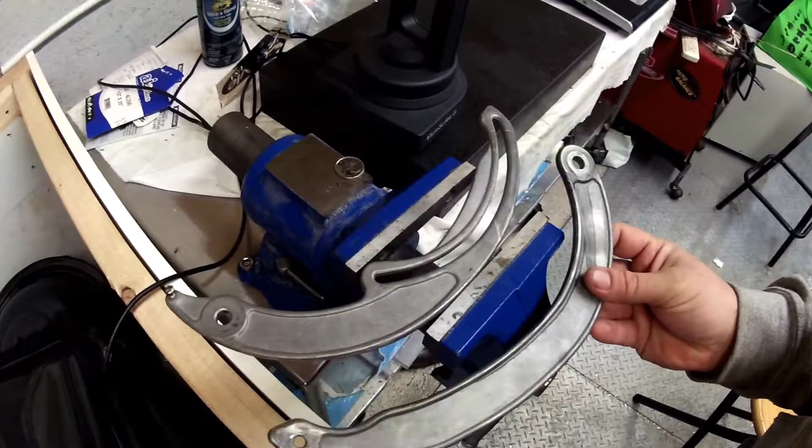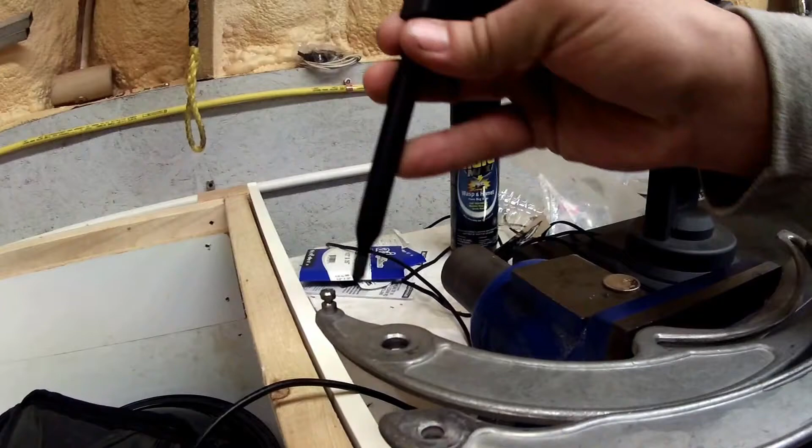These two parts are going to get mapped out and laid out using the Microscribe 3D Digitizer, just to get the dimensions of the parts and all the critical features, slots, holes.

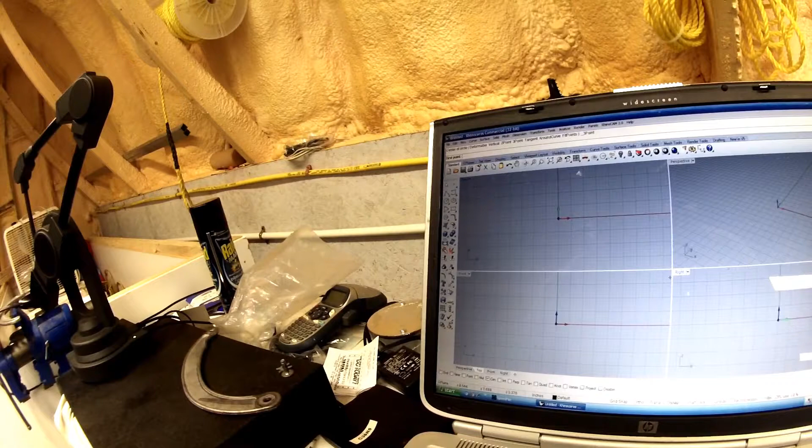Now that the tool is connected, first thing I'll do is use 3-point circles, and we'll just work in the top view so that you can see as much as possible.

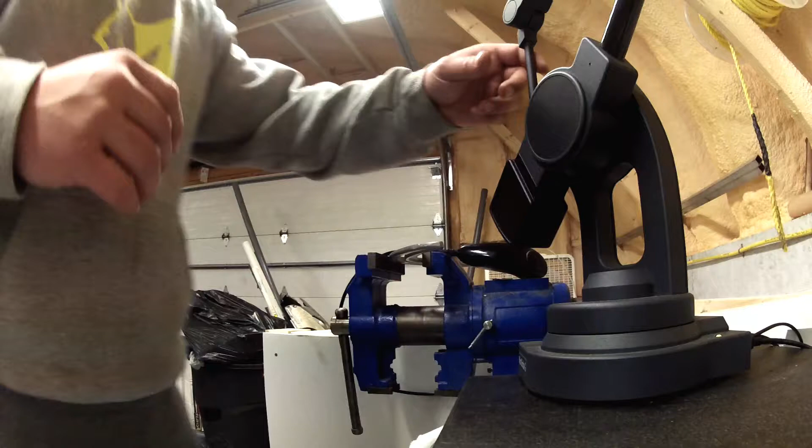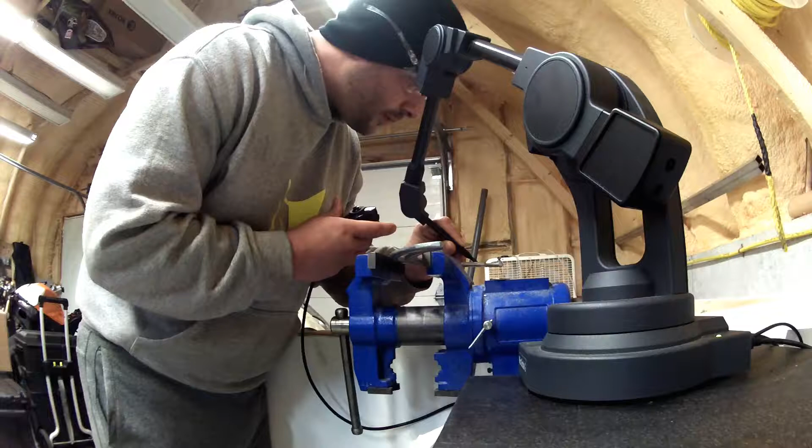If I bring the cursor over, I can see it moving around on the screen. Touch the hole in 3 places. 1, 2, 3. Then right click, which is the top button.

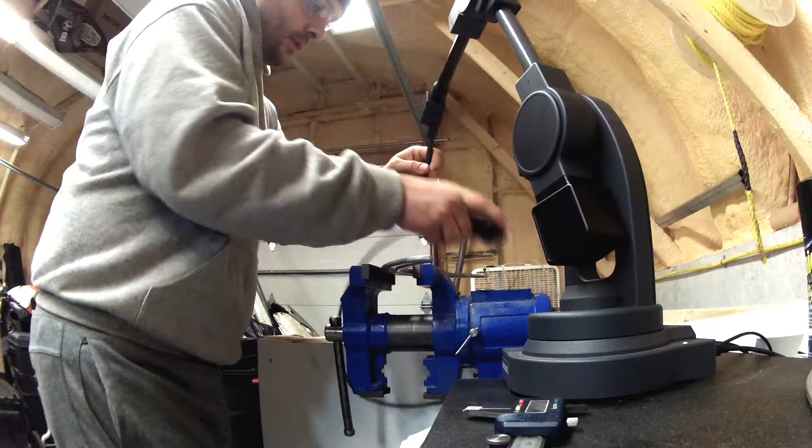Control point curve. That should let me use the points to come along and drag the tip just inside the channel.

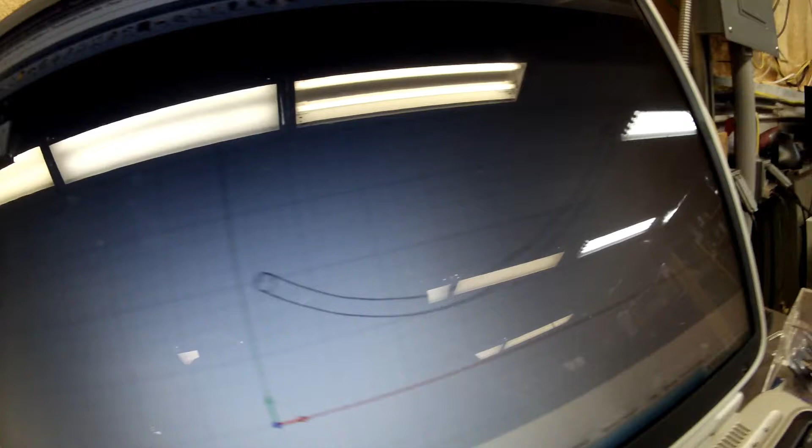Just hit stop and rotate. Try and keep it on the same point as much as possible. This is really rough, but it'll make it easier to figure out. And then the last thing I want to do is make sure that it snaps back to where it started. You end up with an ugly but rough layout to work with of the arc.

Alright, so just picking up where I finished off to show you guys the rest of this for this job. So those holes are all set up, they're spot drilled, then they're drilled through.

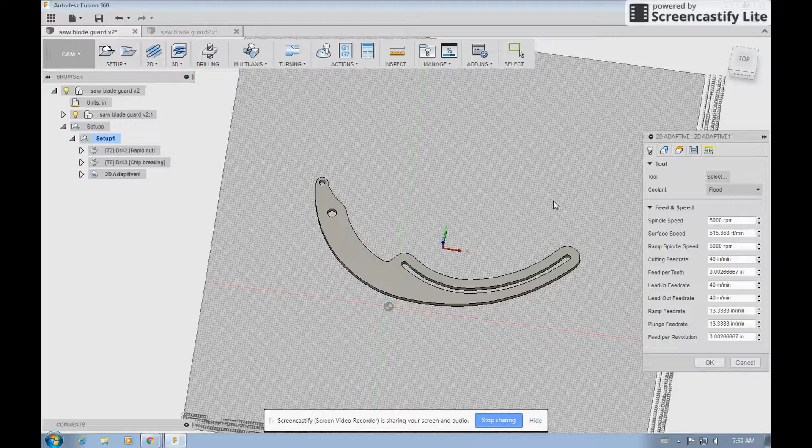Now next is going to be 2D adaptive. We're going to select local. Tool number 8 is a 3/16 flat end mill.

And all of the feeds and speeds are preset based on what I've been using. So I'm going to choose the contour at the bottom of the slot and that hole because they still need to be cleaned out.

And then heights. You want to look at it from, I like to look at it from front on just to see where things are. So selected contours, just so that everything's nice and clean. We're going to let it go through a little more than the actual model, or than the actual stock.

Yeah, that'll work. Actually, no, because it's going to be close to the vice jaw, so we're going to just leave that the way it is.

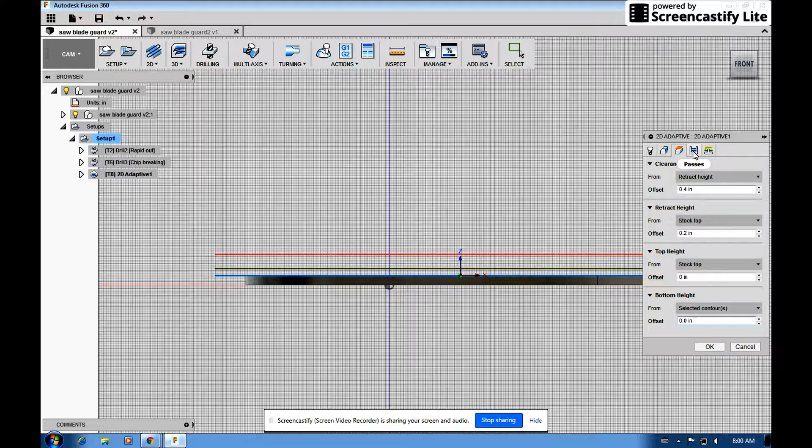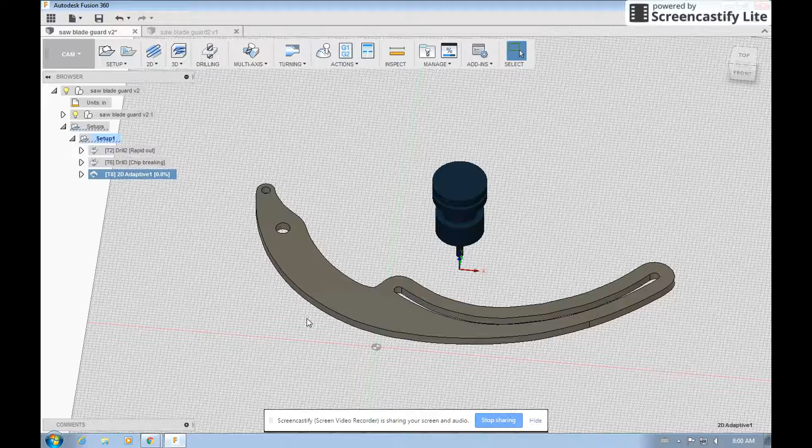And linking, we may not have to change a whole lot. The one nice thing is that we can click the pre-drill position. So we can click on this, and we can click on there, so that the tool will come down in those holes and I won't have to spend as much time interpolating. So that part's done.

And it looks like we got an error, it won't do the slot. It may not be large enough.

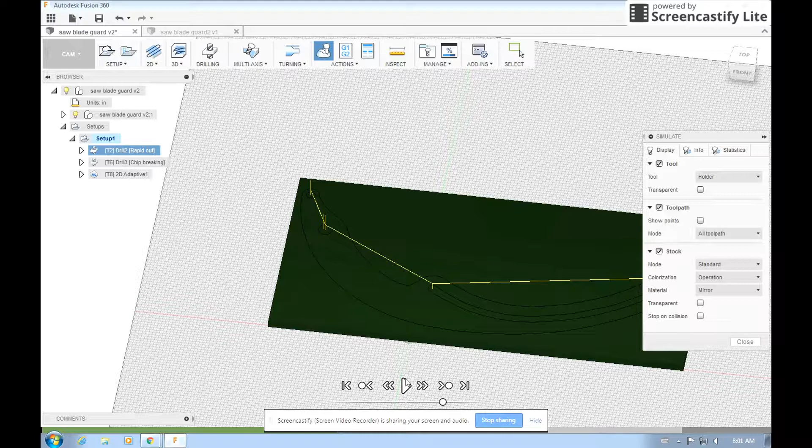So let's just click on the whole thing, simulate, run through kind of quick. I don't know why that didn't speed up.

Okay, so that means we're going to have to run an even smaller end mill to finish up that hole, no problem. 2D adaptive.

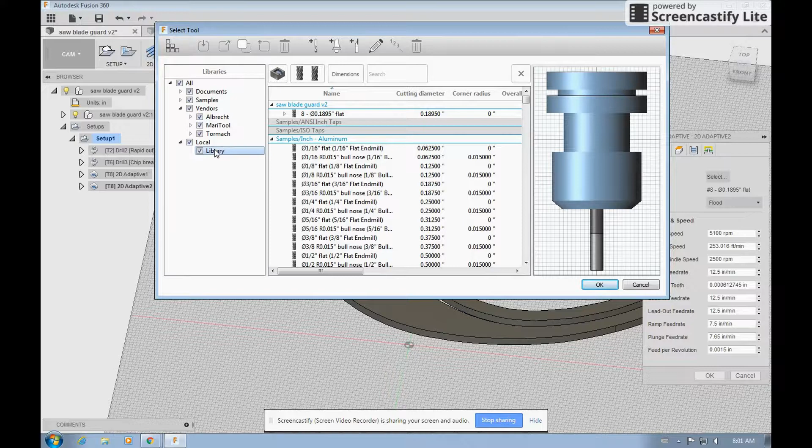Number 10, 1/8 inch ball end mill. There we go.

Heights, stock and top and bottom. Optimal load, 25 thou. It's a little tiny guy.

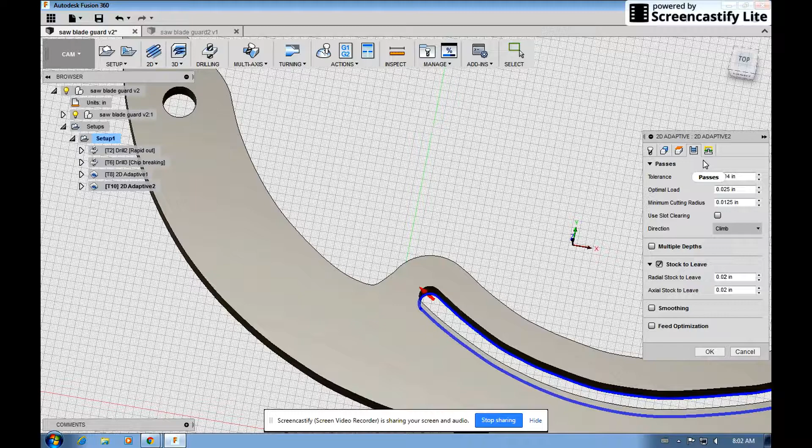I don't want to, yeah, we can do a cleanup pass afterwards. In pre-drill position, click there. Say OK.

And take some time to think about it. Almost there.

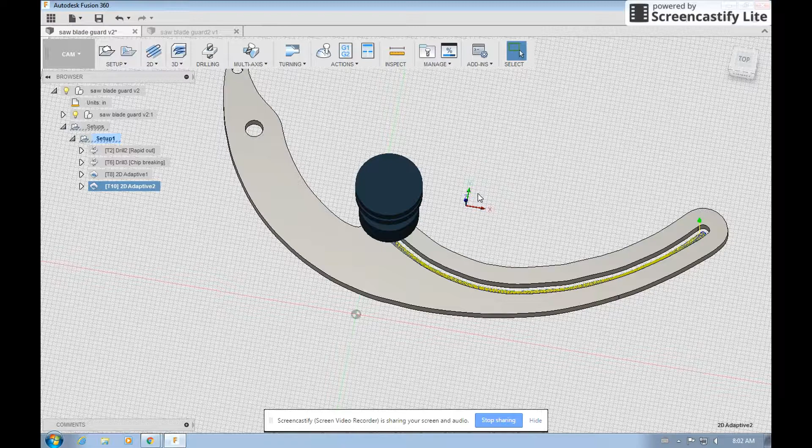Since it's a tiny little end mill though, I may have to do this in 2 steps instead of having the full depth of cut all in one shot, which is kind of unfortunate. But...

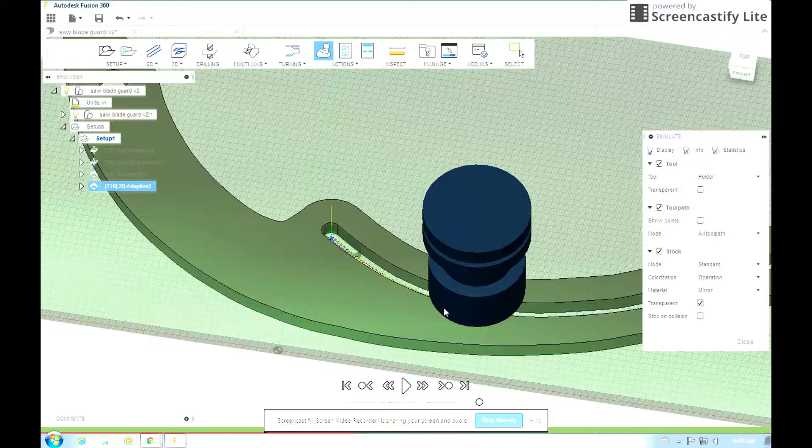Now if I go here and I go transparent, speed this up full tilt, and pause that for a second because it's not giving me much to look at. Take off transparent. Try to move it to an angle so I can see what's happening.

And then slow this down because it's going real quick. So it's just going to work its way around and do slot clearing, which is totally fine.

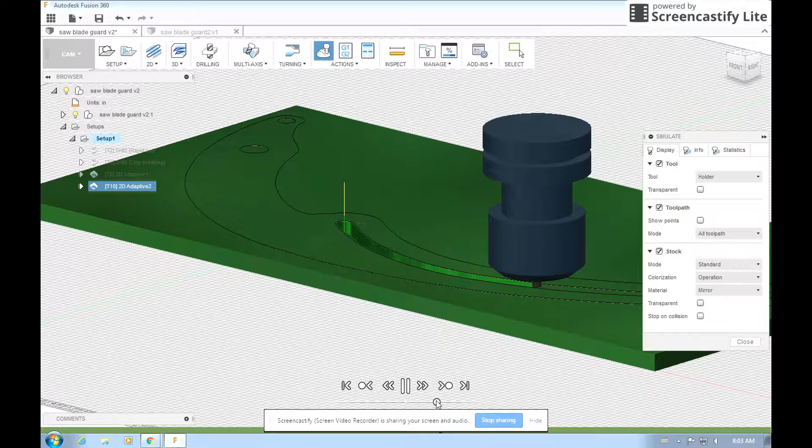Okay, one thing we're going to do is we're going to edit this and we're going to do multiple depths because I don't think that tool is going to handle a quarter. I don't think an 1/8 inch tool is going to handle a 1/4 inch depth of cut. So we're going to do multiple depths.

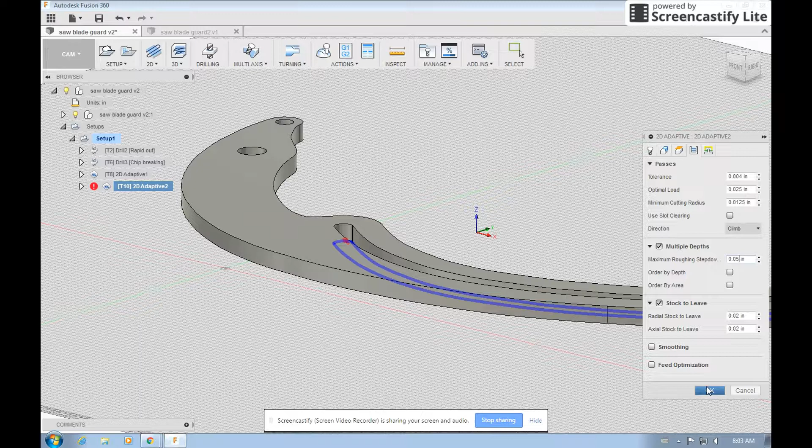Step down, we're going to make it way smaller than that. I'm going to go 0.05. I'm going to leave stock to leave. Click OK. It's going to think a little longer.

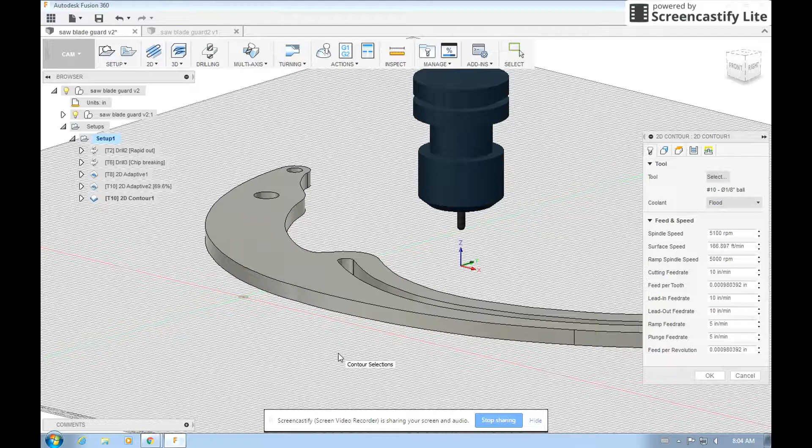And while that's going on, it's getting there. The next step is going to be to do a 2D contour. And I don't know if this is worse because I'm using the software while the software is still thinking about the previous step. This is only at 70%, but it seems to be okay.

So select contours. Select that bottom contour. Geometry, stock tops.

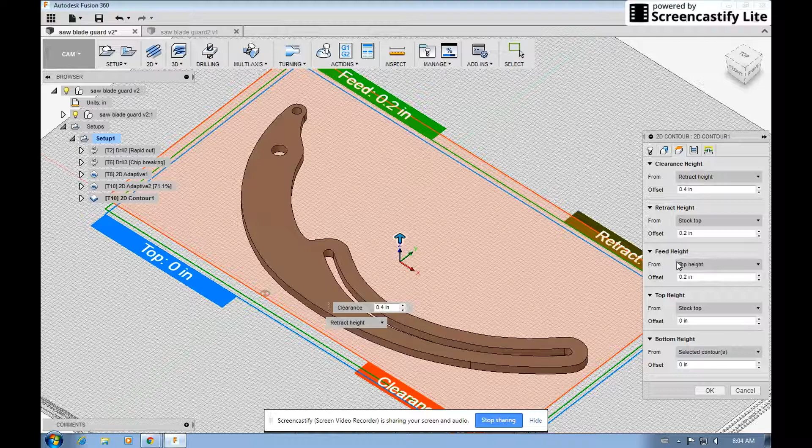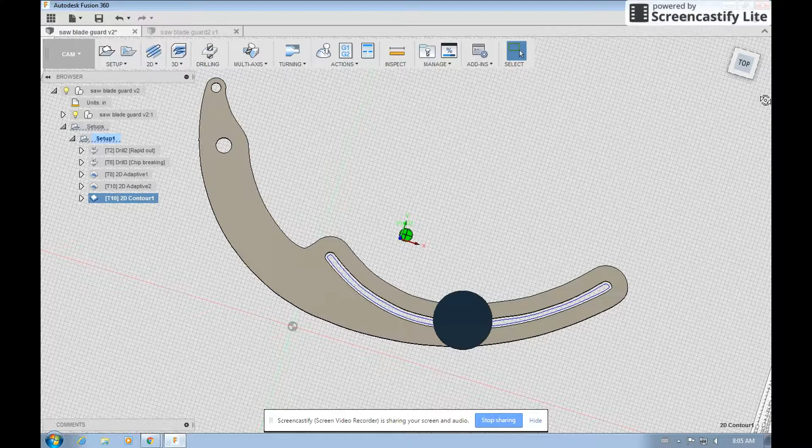And from there we've got not a lot we're going to change. I'm not worried about a pre-drill position because the tool is already going all the way through.

What I'm going to do is open this back up, and passes multiple depths, maximum roughing, step down 40 thou. I'm going to make that 50 thou. I don't think we need to be that soft.

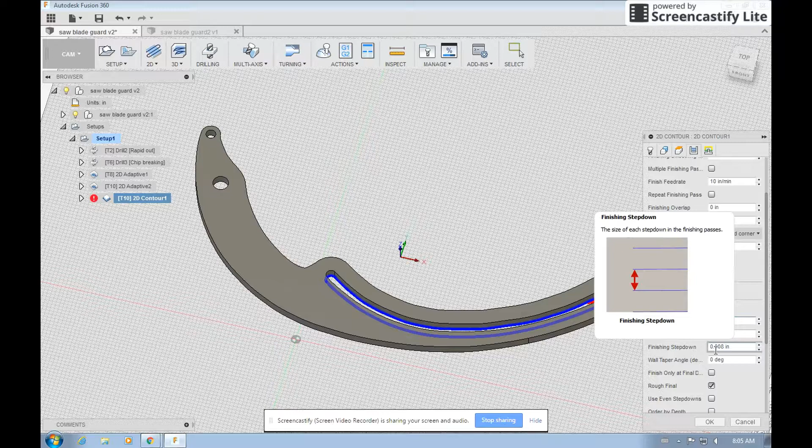That's even a little excessive. That's 1, 2, 3, 4, 5, 7. That's okay. So now we have the whole first setup done.

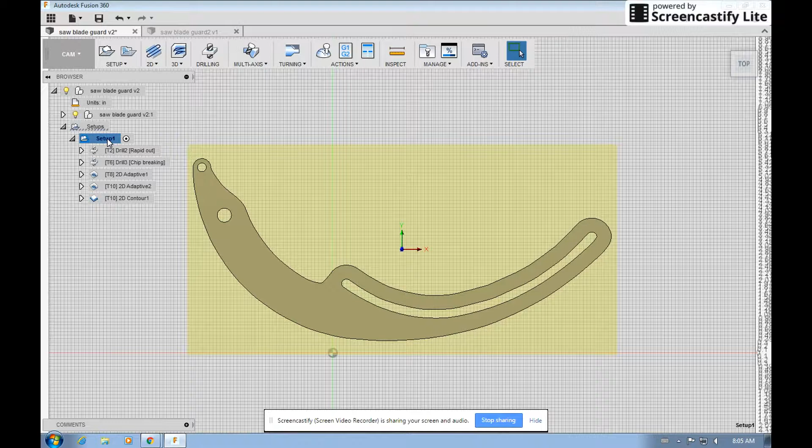And if we just kind of turn this on a bit of an angle, you get to see the spot, spot, spot. Slot cutting tool will come around.

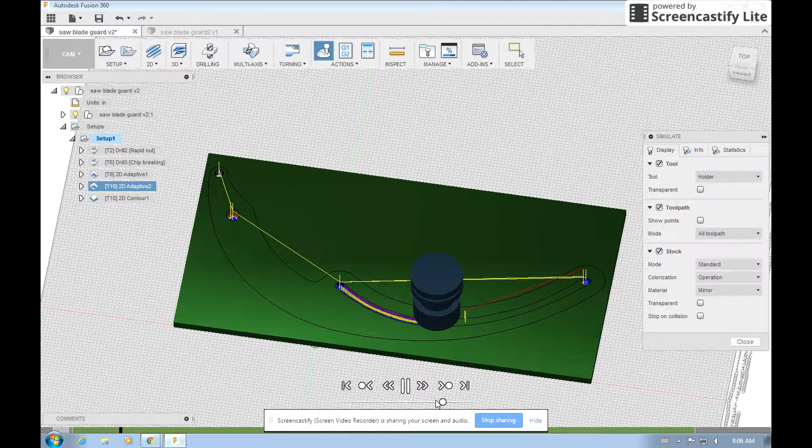Speed it up for the sake of not watching the same thing over and over again. You can see the little circles it's going to make as it goes along through. It's the same color because it's still the same operation. And you can see it doesn't quite reach the lines because there's 20 thou stock to leave.

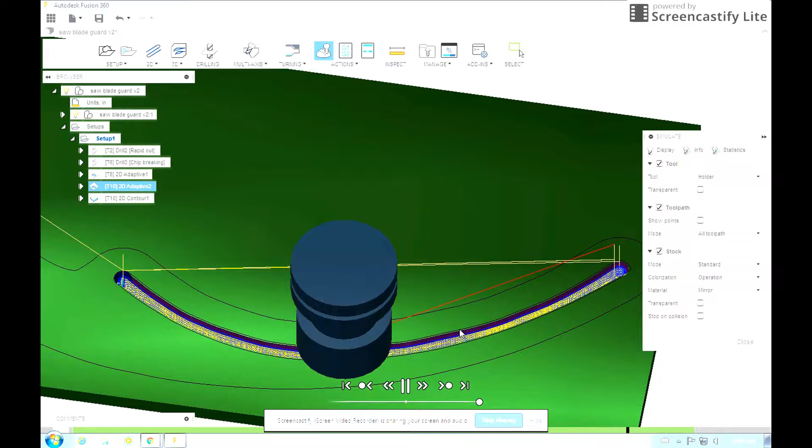And now we should be all the way through the part. There we go. So that's going to be the first step of this.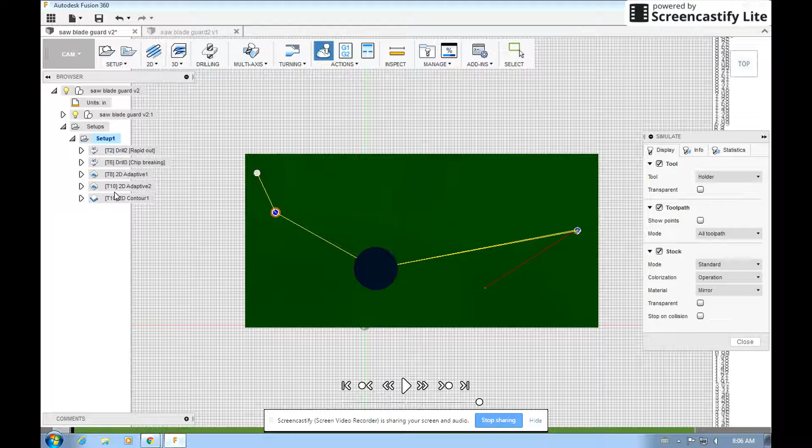Spot, spot, and slot. Now these 2 last steps will be taken out, and just this hole will be done and this hole will be done. I could re-drill this guy. That's no big deal, but I'll probably just repost that one separately.

After that's done, the next step is going to be using the same size piece of material as a fixture and pressing it down in order to just create an outline and a shape, and then modify it a bit so that we've got these holes all lined up.

So that'll be the end of this half of the video, and once the CNC is set up, we'll get the GoPro mounted up so that you can see the machining in action.